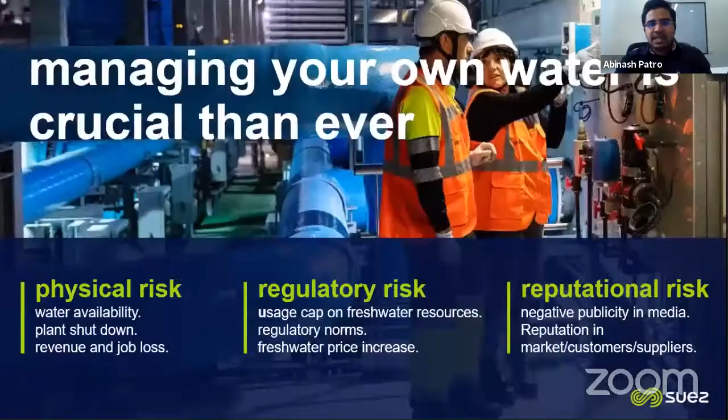Okay, so let me start. Why water, and why managing water is crucial. This we all know, but for the sake of its importance, let me repeat it again for all of you. First is the physical risk. We know how water availability is decreasing day by day.

The stress on our water body, the groundwater, we know everything. Because of this lack of water supply, plants are getting shut down, there is revenue loss and there are job losses. So there is physical risk and we have to manage our water.

Second is regulatory risk. Please take it from me, gone are those days where we can take as much water as per our convenience. Government has started putting a cap on our freshwater resource, because fresh water we have to consume, first priority is for living. The other day I was studying somewhere, without water maximum 21 days we can live, after that we are going to die. So government is diverting fresh water, first for drinking also.

Then the regulatory norms are changing, the discharge norms are changing. We have to recycle and reuse the water. The other day I was seeing in Bangalore, the fresh water price, you will not believe, is 130 rupees per KL for industrial use. Just imagine how the fresh water price is increasing. So we have to go towards recycle and reuse, whose price is far less than the fresh water which we are getting.

So this is important. And the reputation risk - one message in social media or in the press that our plant is not working or it is not adhering to the standard or the discharge standard, we are going to face problem, correct? So these are the important challenges.

Now coming to India, with all this challenge, our population is going to grow up, we are having more industry, urbanization is going to grow up, and it is only going to increase these challenges. Second point, India is ranked 120th among 122 countries in global water quality index. You can see nearly 70% of our groundwater is contaminated, so we have to treat it.

Currently only 30% is going under any treatment. Third, very important, Niti Aayog has already said 21 cities in India, including Delhi, Bangalore, Chennai, and Hyderabad, will run out of groundwater. Very important, these are very important points, again because of that only I'm stressing. And last, as I'm mentioning, per capita availability has decreased - there is a clear deficit of fresh water even for drinking.

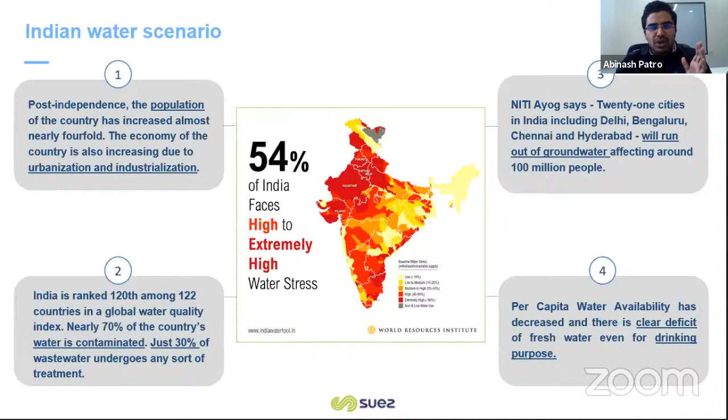So very important, we as a company, across the globe, for 162 years, our only ambition, vision, or purpose is to shape a sustainable environment now, to help all our industrial customers, urban customers, municipal customers solve their water challenges with best-in-class technology. This is what we are striving for, and because of this, we are leading in this industry.

And how are we doing this? These are the three pillars which I want everyone to remember and note down. The first one is we are working with cities to reduce their water footprint. How much water we are consuming, as per research, is 3 times the water which is required. So we have to reduce our water intake itself.

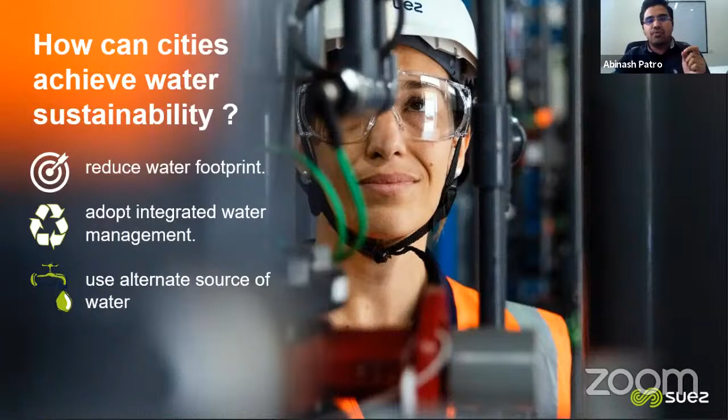Second is integrated water management, where we have to reuse the water, recycle the water. And third, I think all our discussion today is going to revolve around this point - how we can create alternate sources of water. By treating sewage, by reusing sewage, by treating wastewater, we have to create alternate sources of water. One model which is successful in India is decentralized sewage recycle solutions, so we are going to focus on this today.

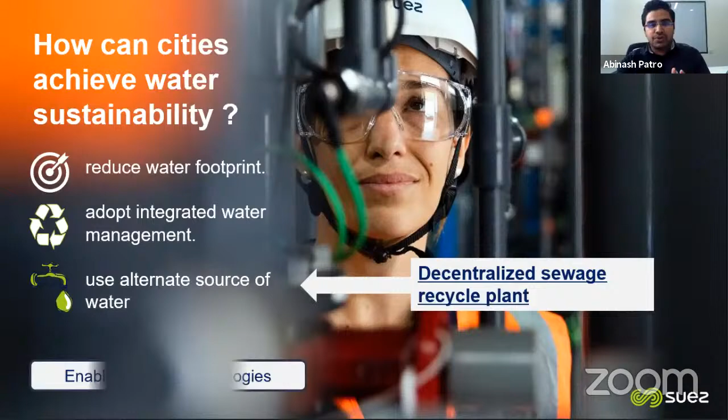So Suez as a company, as I mentioned, when our customers win, we win. So who are all connected? Our only intention is to make you win over these water challenges. As a company, I will skip some of the company introductory slides.

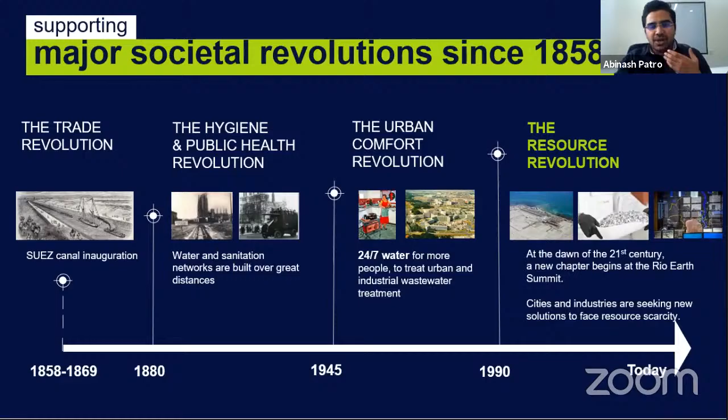Trust us, we are a 162-year-old company, started in 1858, and you all would have heard of Suez Canal - we constructed this canal, and from this 162-year journey we are providing water and wastewater solutions to our customers. Currently, we are a group of 90,000 passionate environmentalists and engineers working with our customers to solve their challenges. By treating water, wastewater and waste, our revenue was 18 billion euros last year, and more than 450,000 customers are working with us - they've given their trust to us, and we are helping them solve their recycle challenges.

In India, ladies and gentlemen, we have been there for the last 40 years. We have developed international advanced technology with local expertise, and we have built people expertise and technical expertise in India for the last 40 years. In the urban sector where you all belong - architects, consultants, the plumbing ecosystem - we are providing decentralized water and wastewater solutions.

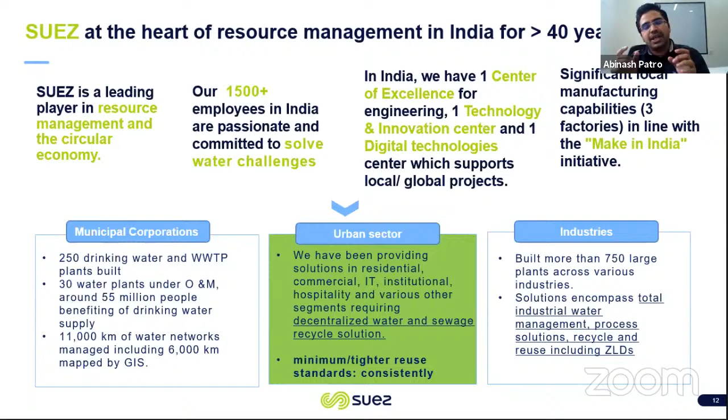The main key takeaway from our technology is we are promoting minimum reuse standards. The quality of water should be totally fit for purpose, so you can directly reuse that quality of water in your other applications. We have a manufacturing facility in Hoskote, in line with government's Make in India initiative since 2009, where we manufacture our membranes and specialty chemicals.

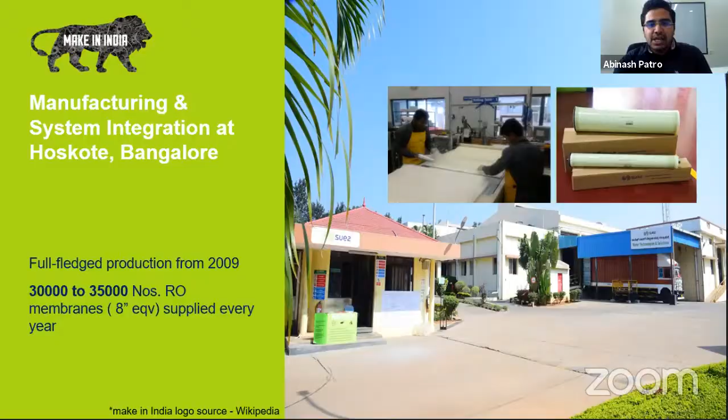Why? Because they want to directly reuse this water. Second, they want to recharge the groundwater with this recycled water, because this water is going to mix with our drinking water, our potable water. So they have to make sure this water quality is equivalent or better than drinking water quality. This is why countries are moving towards more stringent norms.

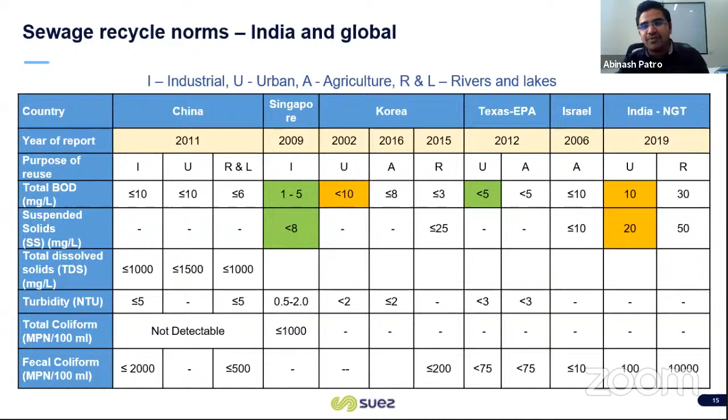In the next slides, we'll see how, as a company, from the last 40 years we've already started working towards this global standard. Being a global company, we have clear information on where the world is moving. Already in India we have supplied more than 250 plants achieving this tighter norm of less than 5 BOD. So on this specific technology we will work today.

Mr. Rajshekharan is here with me. He's going to take us deep dive into this technology and how with this technology we can achieve this minimum recycle parameter. So Rajshekharan, over to you, sir.

Thank you, Abinash. Thanks for the wonderful information about the importance of water in India, and where India is going to have all these challenges. Okay, with all these challenges, how Suez as a company, we are going to help the India market.

Today I'm going to talk about, since most people are aware of it, the new technology of MBR, or membrane bioreactor technology. I will talk a little more about that - how this will help recycle your sewage water to reusable water quality. This is a fantastic product line which is available across the world.

How has it been over a period of time? This has actually evolved over a period of time in the world, and how customers are getting benefited - this is what I'm going to talk about today.

So actually this slide - MBR is nothing but membrane bioreactor technology. It's the most advanced technology compared to your conventional sewage treatment systems. This technology started in 1983.

At that time, this technology was not very famous, I would say. So it started in 1983, and over a period of time this technology has been adopted very well, especially in the last almost 10 years. It has been accepted across the world very well.

We can see that in 2018, more than almost 20,000 MLD of water has been treated with our new MBR technology - that means the ZeeWeed technology - it's been utilized across the world.

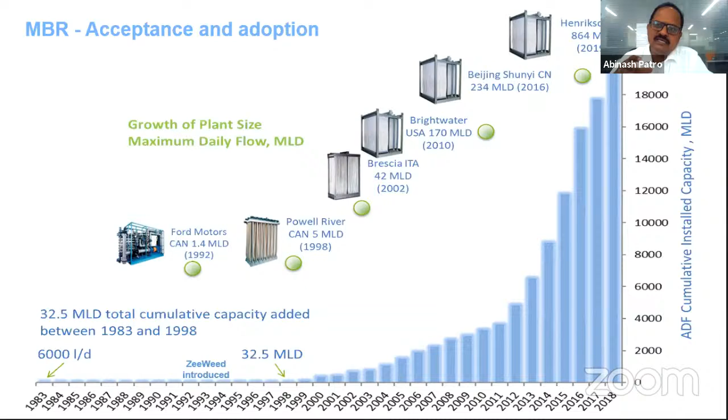You can see one of the biggest customers, like 864 MLD, with our MBR process being followed. So like that, many processes have been followed. Why am I talking about these things? The technology has been very well adopted across the world, and also very successful in India as well.

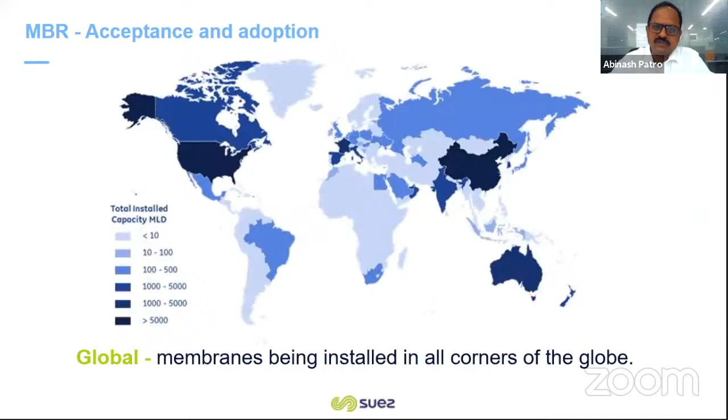You can see the dots in blue color across the world where it's been adopted. Even in India, most customers know about MBR technology, and if they know MBR, that means ZeeWeed is one of the pioneer products in resolving all their water challenges, both on the sewage and tough effluent side. And in India, we started our first plant in 2004 at Cubbon Park.

I think many of you know about this Cubbon Park plant. From there our journey started in operations, so our company journey started with the MBR technology, which is the advanced system. Right now we have more than 800 installations across the world, across India, and more than 2,000 installations worldwide.

With the 800 installations, more than 225 MLD of water every day is treated with our ZeeWeed process, and it's reused for all non-potable applications. In that MBR segment, Suez has the maximum market share of around more than 70%. This comes from all the trust from customers. They used our product line, and not just one time, again and again they have used it.

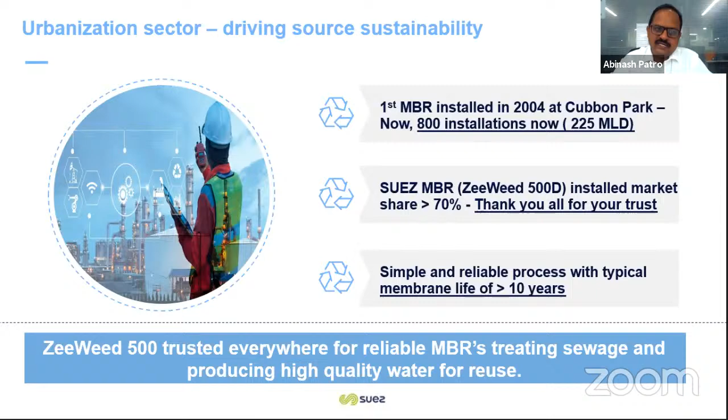So some of the customers I'm going to talk about today: more than 25 plants in their campuses they have installed with MBR systems, and some customers installed more than 15 plants with our technology. That means all the customers understood the importance of wastewater recycling, and only trust the brand - that means ZeeWeed 500D product line.

Now I'll talk a little bit about what MBR is. We talk about advanced systems and all that - how it works when comparing with the conventional treatment process. MBR is nothing but a membrane bioreactor process. It's basically a combination of your conventional biological process as well as the membrane filtration process.

After the bioreactor tank, it goes into your membrane system. In the membrane process, only clear water is sucked out, leaving all the sludge, and the BOD and COD everything gets filtered by the membrane process. The membrane produces only clear water and acts like a complete barrier, giving you consistently good water quality which is reusable for all non-potable applications.

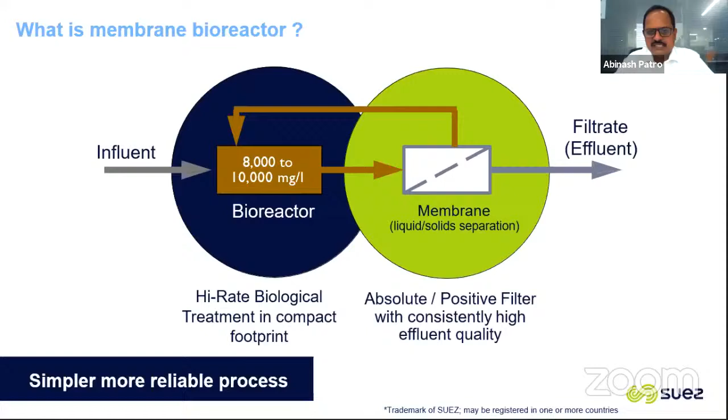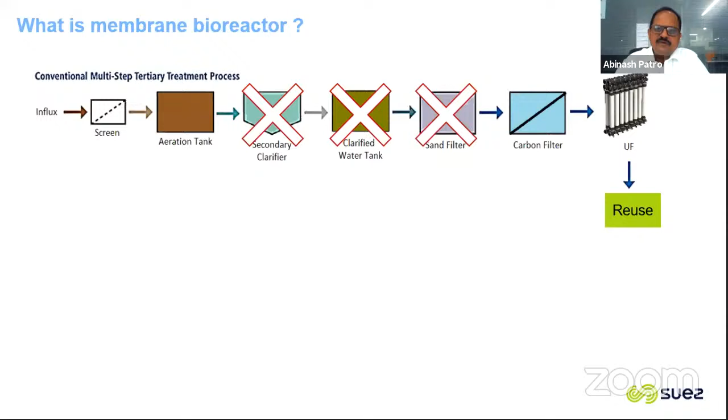So what's the comparison between conventional systems versus our MBR process? Conventional typically follows screens, aeration tank, secondary clarifier, clarified water tank, sand filter, carbon filter, then ultrafiltration to get reusable quality. But with MBR, you don't require a secondary clarifier, you don't require a clarified water tank, even a sand filter, even a carbon filter, even ultrafiltration.

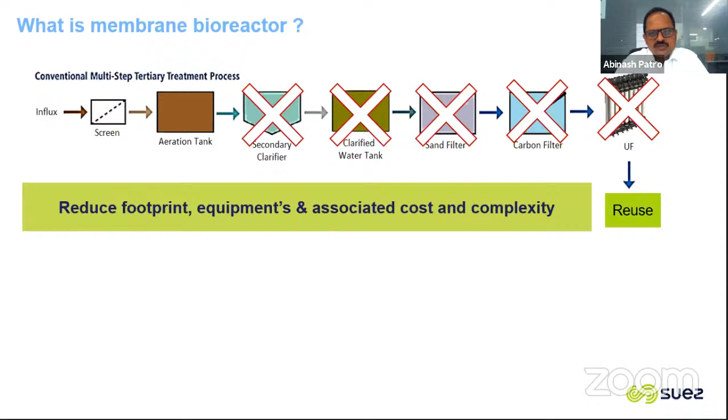So with MBR process, we reduce all the process steps and make it into very simple solutions. We only require a fine screen and the aeration process - the membranes will be installed in the same aeration tank or a separate membrane tank. From there we suck the clear water, which can be completely used for all non-potable applications like cooling tower makeup, gardening, or toilet flushing. By reducing all this process, we already start saving footprint, and also save so much equipment and complexity.

In today's world of urbanization, space becomes very, very critical. If you talk about main cities like Mumbai, Delhi, or Bangalore, the per square feet cost goes up to 30,000-40,000 rupees per square feet. But when you save so much space with an advanced technology, the return on investment you can get very, very quickly.

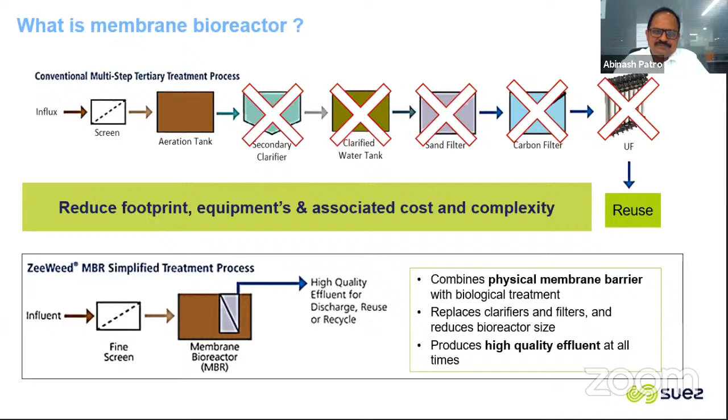So this is a simple process of MBR: bar screen and oil skimmer, followed by equalization tank, then fine screen. The fine screen is mandatory we provide, because especially human hair and as well as some blades or pins should not go and damage the membranes. After fine screen it goes to the biological process, which is common for both conventional as well as our MBR process.

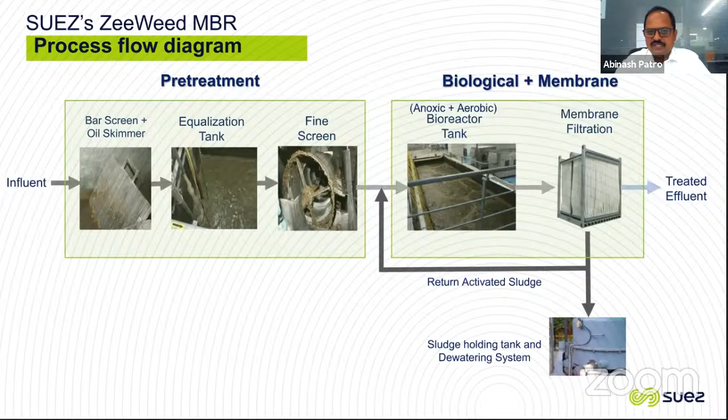Okay, so just imagine half of the space, if you are able to save it, especially in the cities like all the metropolitan cities, you can save a huge amount of cost. Correct. So this is a technology which is available. Yes, most of the people are aware of it, but now the awareness needs to be increased, so that every STP should come with advanced technologies like MBR technologies.

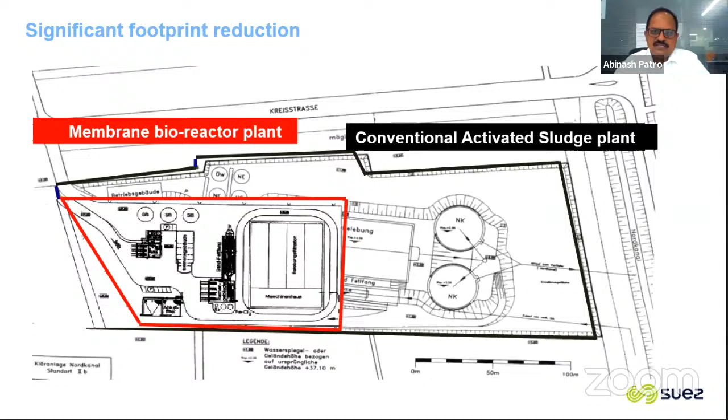Okay. So it's not only that it saves space for the new plant, but also for the existing plant. If you're already having a plant and want to increase or enhance the capacity, we can easily retrofit with the MBR process, this membrane bioreactor process, and easily increase the capacity up to 3x, which we have proven across India. Say for example, somebody has a 300 KLD STP, which can easily be increased to a 1000 KLD plant. So 3 times you can easily.

In some cases we even went to 4 times. It all depends on the space availability. But even the existing capacities, you can easily increase to 3 times and above, which will reduce your additional civil requirement and space requirement. And not only that, you also get consistent outlet water quality at all times of operation. So this is a beautiful technology, and it has been adopted across India. And recently, even for 5 KLD to 10 KLD we have a membrane. I'm going to talk about this right now.

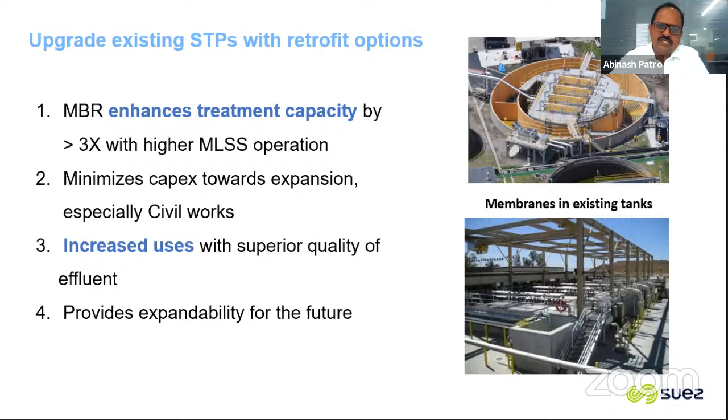So what is that? We talk about consistent outlet water quality. Just see the NGT norms. The NGT norm says BOD less than 10, whereas our MBR process can give you less than 5. Just imagine how good the water quality the ZeeWeed MBR process is going to give you. Similarly, COD is 50 as per the norms, maybe 50 after ultrafiltration, but with the MBR process you can get less than 30. Similarly, TSS, you will get less than 2. So that means it's complete water.

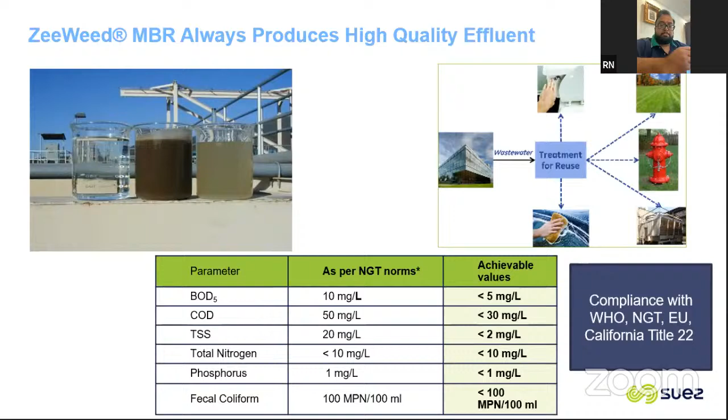So why are these membranes so famous? This is a patented technology of Suez, both the fiber as well as the potting technology, and it is made with one of the best polymer chemistries, PVDF, polyvinylidene fluoride, which can withstand a much longer life. Normally this membrane's life is typically 8 to 10 years. So once you install, you don't need to change the membrane for a minimum of 10 years. In India itself, we have a reference of more than 12, 13 years where the membrane was not replaced and it is still working.

And also we follow out-to-in technology. It's an excellent flow path. It reduces blockage, and it can operate at a wide pH range. The nominal pore size is 0.04. That means it can remove all bacteria, turbidity, virus, protozoa, everything. Today the world is completely afraid of the virus, right? Everybody knows that. So even viruses, 99.99%, these membranes can remove from your sewage water or your drinking water application.

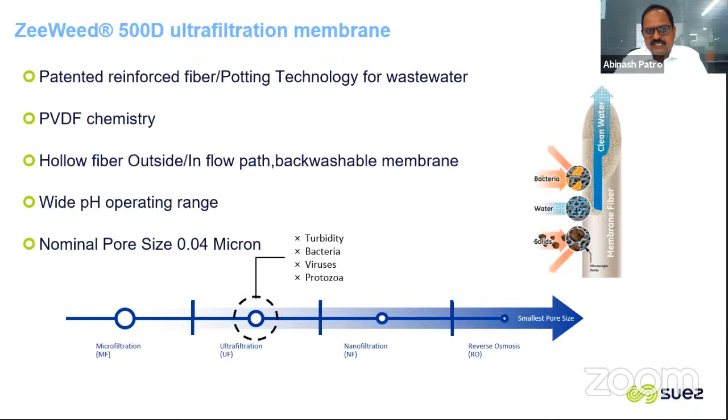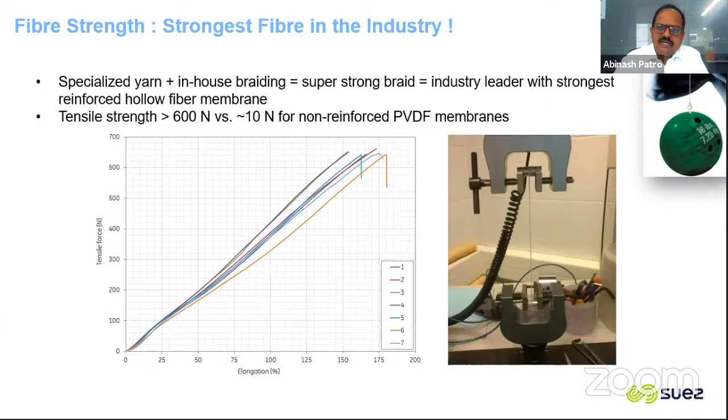So this will give you the completely safest water, including for non-potable applications. Where gardeners are using this water, if somebody unknowingly touches or maybe drinks it, nothing will happen. That means this removes bacteria and virus completely from the sewage system. I also talked about the long life. Actually, this has the highest strength of more than 600 newtons, and as already discussed, it is made of reinforced fiber with PVDF technology.

So earlier I talked about the lowest capacity of the MBR system. If you had asked maybe 3 years ago, do we have an MBR process of less than 50 KLD capacity, at that time we would have said no. But right now we have membranes available from 5 KLD onwards. 5 KLD means what?

Maybe the apartment complex of maybe 5 houses in a small community, or maybe 10 houses in a small community, which can produce approximately 5 to 10 KL of sewage water in a day. Even such a small apartment complex can treat it with the advanced technology of our MBR process, the ZeeWeed 500S process.

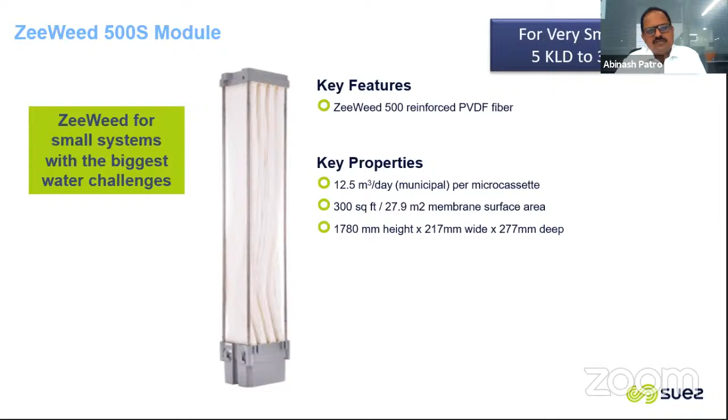So with these membranes, we have introduced a very simple membrane. This can be inserted into a single tank design, which saves a huge amount of space. And we can see the area required: 1.7 meter height, 0.2 meter width and almost 0.3 meter depth. So imagine, this is such a small, very compact membrane. You can just put it into the aeration tank of the STP and start sucking the water. So you can save a huge amount of space, as well as get consistently very good outlet water quality. So this is actually fantastic.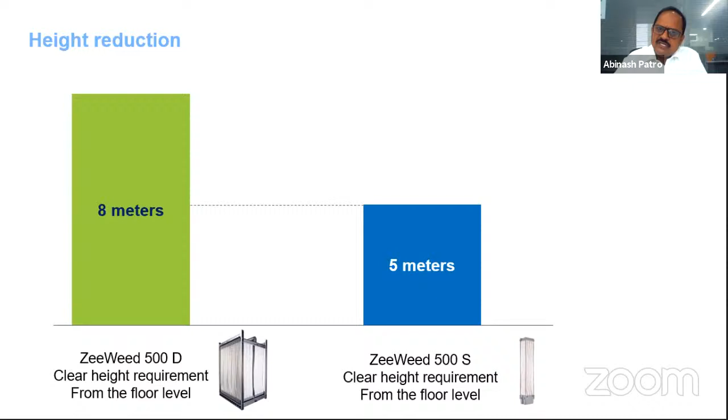One more addition with these new membranes. Earlier we required a minimum height of around 8 meters. Especially in apartment complexes, and especially in buildings below the basement, it's very difficult to get 8 meters. But with the introduction of the new membrane, we can reduce it to 5 meters only. Sometimes even with 4.5 meters we can easily retrofit with our MBR process. So just imagine, around 38% of the space has been reduced when compared to the earlier MBR process and the new MBR process.

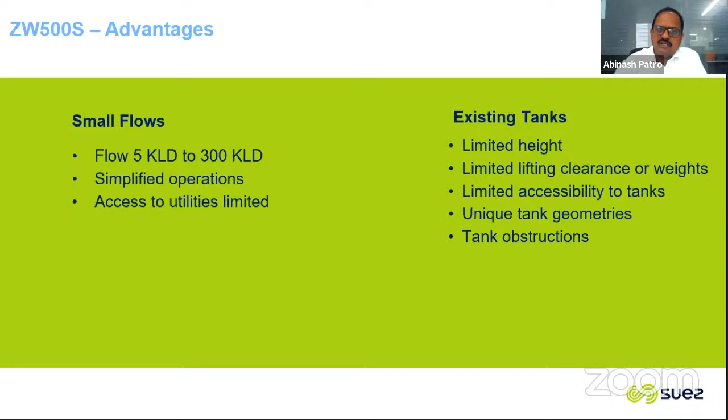And now I'll talk about the small flow, of 5 KLD to 300 KLD. This is the simplest form of membranes available. Since we have installed more than 800 plants across India, we have the complete experience. So even small OEMs and system integrators can easily install a 5 KLD to 300 KLD plant. We have the complete backup from the Bangalore office, which can easily provide drawings and commissioning support. So this is actually up to 150 KLD.

It's not only that we supply the membrane; it is also a completely packaged unit, a very compact packaged unit. For example, a 150 KLD plant requires only 8 by 4 meters of dimension. Within this area, we can easily fit a complete STP plant. As I talked about, only less than half of the space is required when compared to the conventional system. Just imagine, 150 KLD in 8 by 4 meters. How much space we can save, right?

So this is the biggest advantage of the ZeeWeed 500S product, and not only that, you consistently get good water that can be absolutely reused, and you can get a return on investment of typically 2 to 3 years. In some cases we have even proven a return on investment of less than 2 years for our customers.

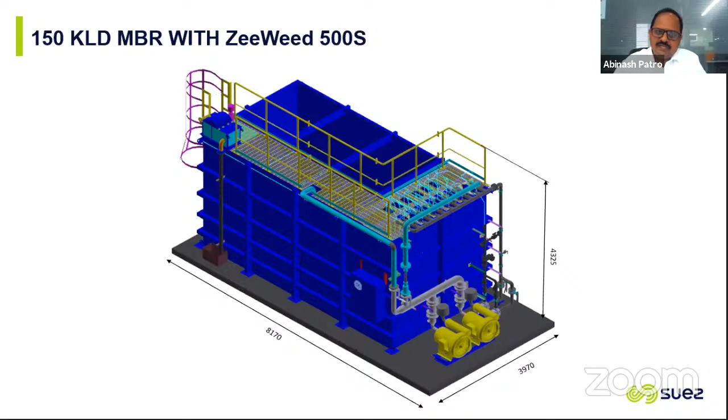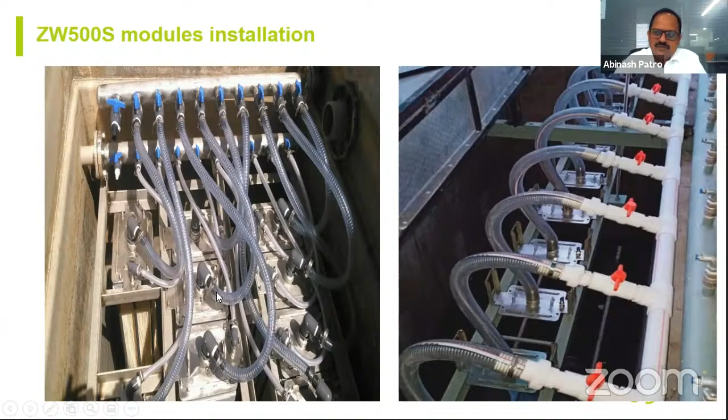So these are some of the examples where our membranes are installed, and it's kind of hanging. And these are some more photographs where our ZeeWeed MBRs are installed. See, if somebody wants to remove only one membrane, you can just close the tap and remove the pipes. You can easily remove it, clean it, and put it back into the system. During the cleaning of the membrane, you can still run the continuous process. So you don't need to stop the plant, and at the same time you can clean the membranes. This is the biggest advantage of this process.

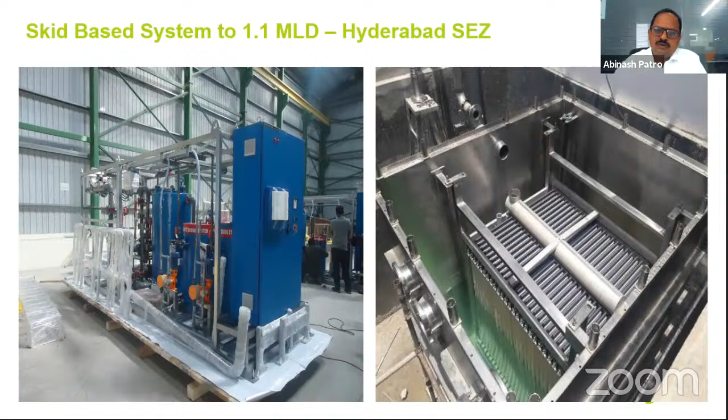And in addition to that, we also provide skid-based systems. One of the plants is in Hyderabad: a 1.1 MLD plant with a small skid of around 7 meters by 3 meters width, which we have installed. On the right hand side, you can see the membrane tank and the cassettes installed in it. This can produce approximately 1.1 MLD of flow. Now you can compare with any existing conventional process, either SBR or MBBR, versus the MBR process, and how much space it saves for customers, in addition to all the benefits I talked about earlier.

If somebody wanted to take it for drinkable water quality, then RO may be required. At that time, you can easily put that RO and start using it for everything, including drinking or maybe bathing purposes also.

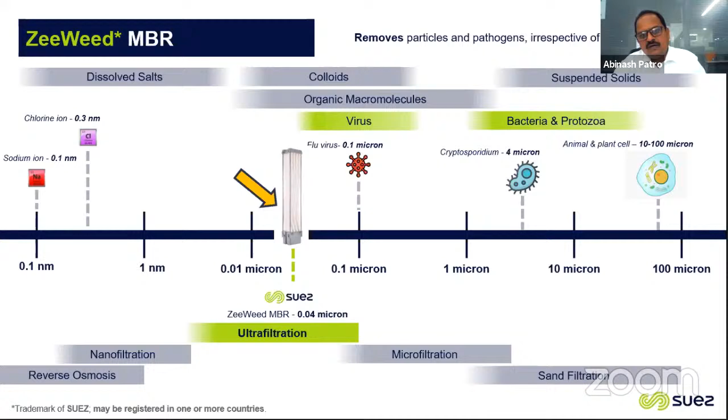Especially in Singapore, there is a water called NEWater, where treated sewage has been partially mixed into the drinking water, almost 33% of it. In that process, our ZeeWeed MBR has been used, and the MBR outlet water, after multiple processes of treatment, goes for drinking purposes as well.

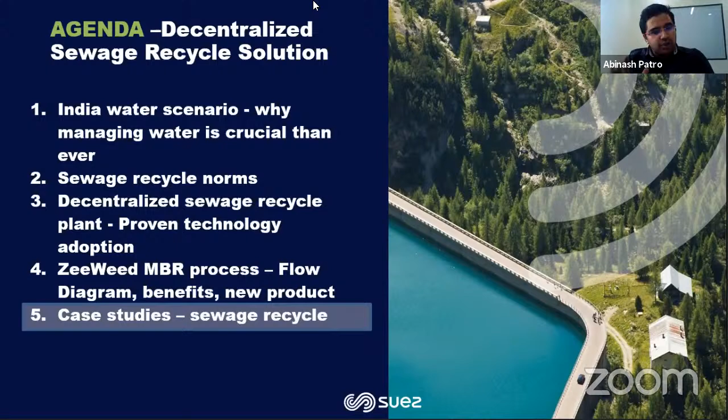So now, we have seen the technology, the parameters, the application. We will discuss two case studies, not in very much detail, but at a very macro level. The in-depth analysis of these case studies, the actual results the customers are getting, and also the savings, we will discuss in session 2, which is next week. So again, connect with us. But let me discuss two case studies now on a very macro scale.

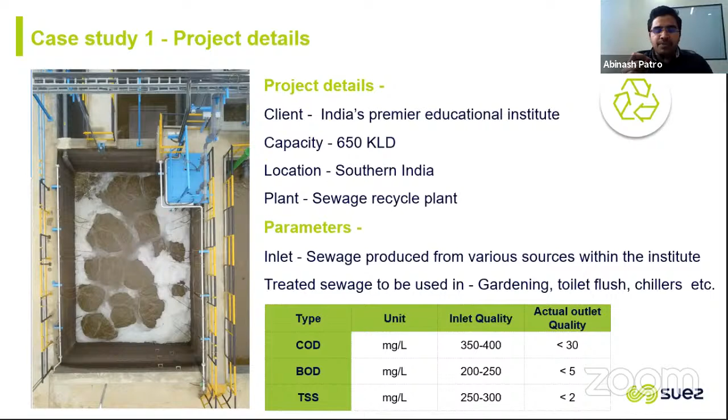This plant we have supplied to IIT Hyderabad. IIT being a premier institute, they are always very particular about what kind of advanced technology they can use and how they can improve on it. IIT wanted to recycle and reuse 650 KLD of sewage, currently generated from various sources like their hostels and offices, and they want to reuse every drop of this sewage water for gardening, toilet flushing, and also the chiller.

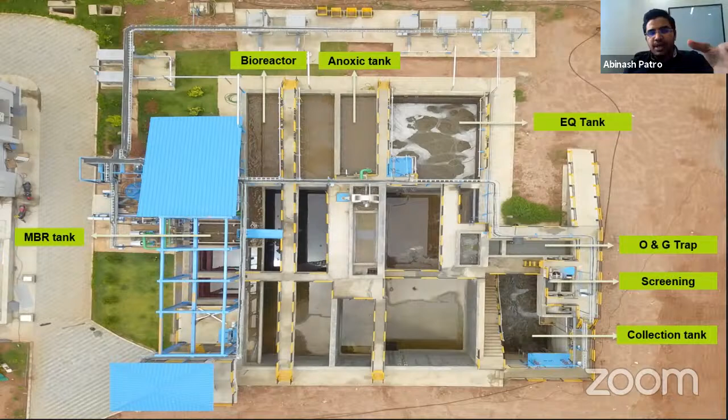You can see the plant here. This is basically 650 KLD, but it is expandable by one more 650 KLD. You can see how beautifully this plant is designed with collection tank, screening, oil and grease trap, equalization tank, anoxic tank to remove N and P, then bioreactor and the MBR tank. This is the MBR tank, the heart of any sewage treatment plant, where the biological process happens, which Raja just explained.

And this is the feedback from the IIT director when I met him. One of the strong reasons they wanted this kind of technology is that many times gardeners, while watering the plants, use the water for drinking or washing their face. So IIT wanted to take extreme care of those people who are touching the sewage water. That's one of the reasons they've gone with MBR technology, because MBR means you get high quality reused water.

So this is the plant at IIT Hyderabad. We have a complete video of how this plant works, which we are going to show in the subsequent sessions next week.

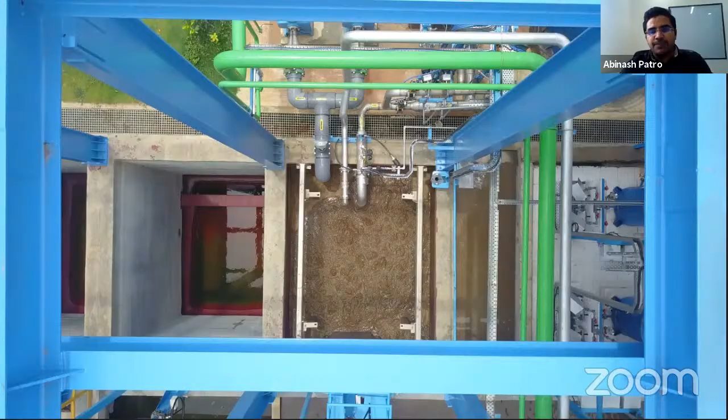The first plant is IIT Hyderabad. Second, this is a plant for a complete township, Palava City in Mumbai, for Lodha Group, one of the leading real estate developers in India. They wanted to recycle every drop of sewage the township generates. They wanted to reduce the fresh water intake, be self-sustainable, and be water positive.

I'll tell you how they became water positive. Currently, Lodha is totally recycling the sewage, and as a CSR activity, they're supplying this treated water to nearby pharma and chemical industries. They've reduced their fresh water intake by more than 50%, and Lodha Group is using every drop of sewage.

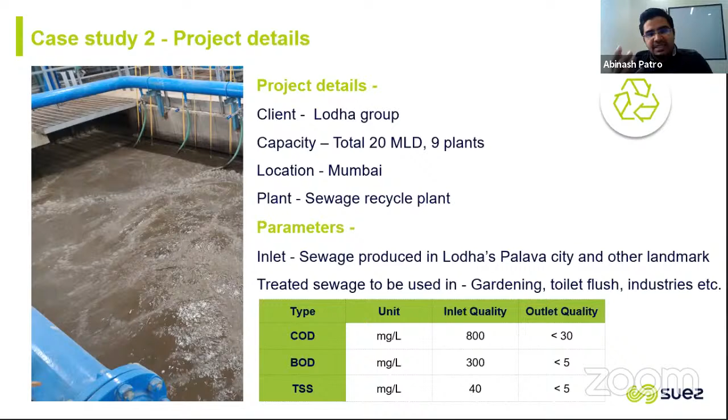Again, this case study we are going to go one level down: what is the process, what are the real benefits, what is the area consumed, in our next session. We will also show you a live interview of Mr. Shrey Dharia, the CEO of Lodha, on his views about using advanced and decentralized technology for sewage recycling. So this is on Lodha.

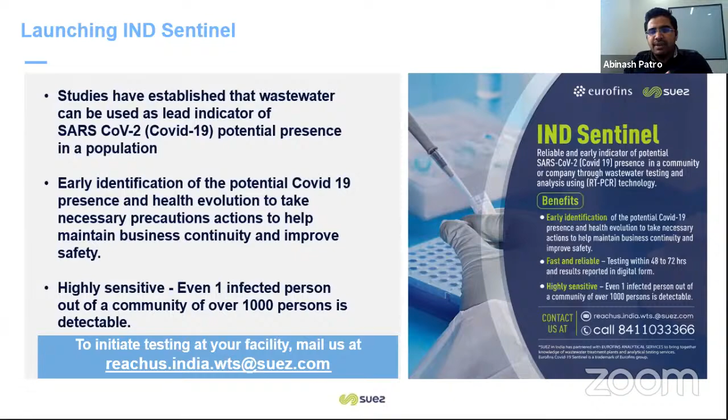And important is, this is an early indicator. So we should not wait until COVID-19 is spreading and then take action. It is an early indicator of COVID-19. This is a very important offering which we are offering, very minimal cost and very fast and reliable. So this is on the IND Sentinel.

Now over to all of you for any questions which you have in the top of the mind. Also in the next session, I again invite all of you to join us, where we will have a detailed deep dive analysis on some 4 or 5 case studies on sewage recycle and reuse. So over to everyone for any questions. Myself and Mr. Raja, we both are here to answer your questions.

Yeah, good afternoon, sir. Good afternoon. Hello. Yeah, good afternoon. I can hear you. Yeah, can you hear me?

Yes, very clear. Sir, one challenge I faced in effluent treatment is sludge management. So have you got any specific solution for this sludge management? Yeah, I think it's a great question, sir. In fact, this is one point I missed to talk about, the sludge management. When you are comparing the conventional system versus the MBR process, the MBR process is operated at a very high MLSS value in the bioreactor tank.

Normally a conventional system operates at 3000 MLSS, and when it's discharged, the sludge is around 3000 MLSS. Whereas the MBR process, we operate at 8000 to 15,000 MLSS concentration. That means you are concentrating it more than 3 times compared to the conventional process, so the total quantity of sludge you are disposing can be reduced almost 3 times. In a normal conventional system, around 10 to 15% of the sludge you need to waste. For the MBR process, less than 2% only you need to waste.